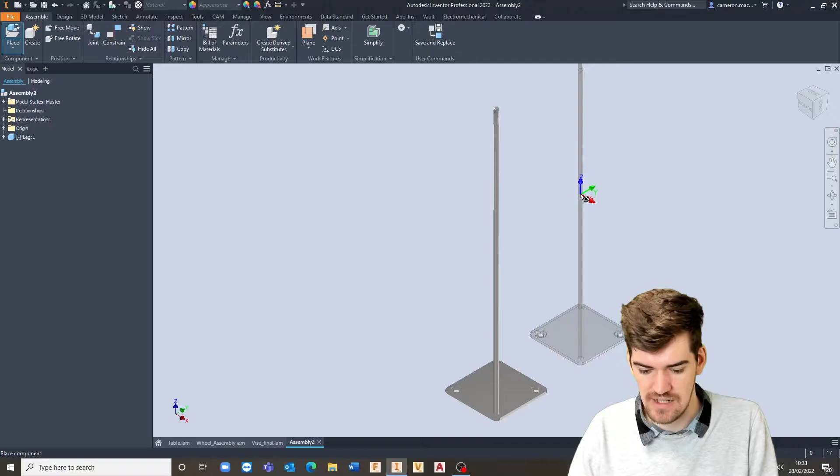It's then a case of just clicking and placing any of these down. Say, for example, I wanted to bring this leg in, I'll just open here and place it down. I can click to place that down, and I can place down multiple instances of this anywhere inside of my assembly.

Once we've got them placed in, it's then a case of adding either constraints or joints to ensure that they remain within relationships to each other. Obviously when we're placing down in the real world, we're placing legs on, or a countertop on legs, and we know there's going to be a certain relationship between those two. Inside of the assembly environment it's much the same process really - we need to establish what the relationship between certain components and certain parts will be.

As we start off, we need to essentially set down at least one item that's grounded, otherwise all of your items will be able to move freely in the open space. As you can see here, I'm just clicking and dragging to move these individual components around. What we need to do to ensure that at least one of these components stays exactly where it is, we can actually ground a component.

The other items, the other assemblies that I'll show you just now, have these in, but essentially all we need to do for that is we can pick the item that we want, the component, the part that we want, and we can ground it to make sure that it doesn't move around.

And we can do that inside of the model browser. Very similar again to the part files that we had last time. We've got this model browser here, and we've got one as well for the assembly environment, where this one lists individual parts.

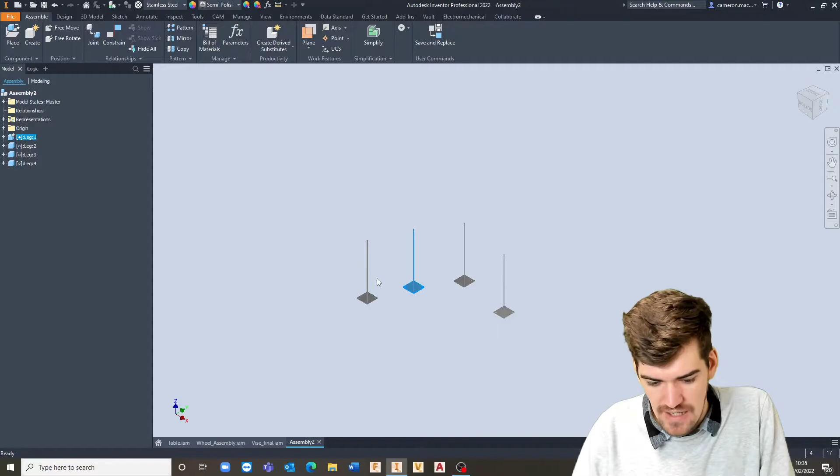So I can right click on any one of these and select grounded from the list, and you can see that adds a little pin to the item in the browser, and that leg now won't be able to move around. I'm clicking and dragging on it and it won't move, however all of the other ones move around. So we can easily place one component down, make sure it's grounded, and then start building on top of that, whether we want to add constraints or joints.

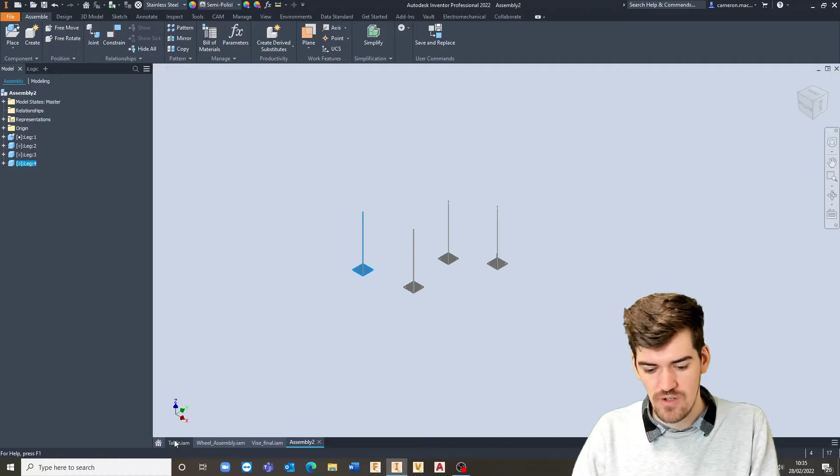I'm just going to jump over to one of the other ones that I've got pre-configured, just for the sake of time, for this demonstration. And that's this table over here.

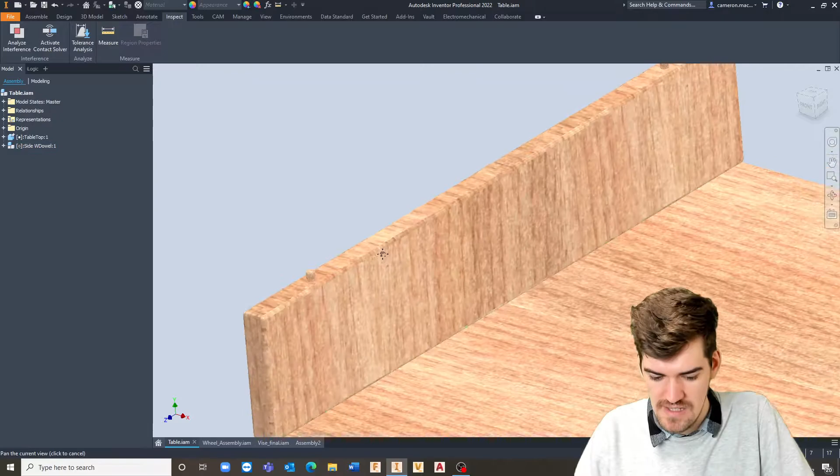As you can see with this one, I've got this tabletop, which is just a flat sheet of wood, and then I've got a side sub-assembly. The only reason it's a sub-assembly is because I've added these dowels in where the holes will attach. So you can see again, we've got a sub-assembly inside of this assembly, so that if I had to open this up separately, you'd see it's just a normal assembly with a single part and 4 dowels coming into the side, just to make sure we've got this detailed as much as we can.

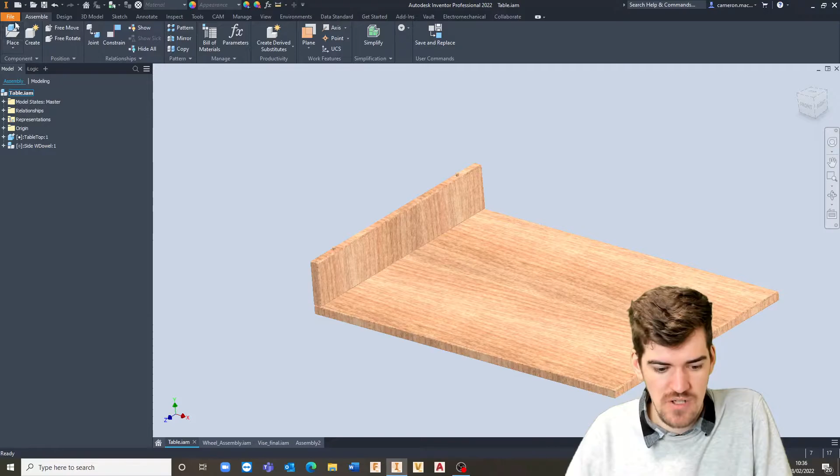If I have a look here at the assemble tab, again we've got those same options. We've got the place, and we've also got the ability to create, more on that a little later on. But essentially, we've got our 2 parts, or our part and our sub-assembly, in the list.

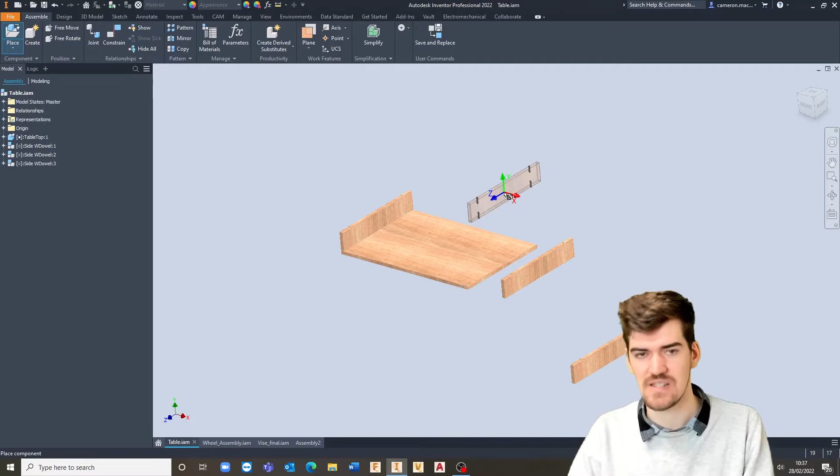All I now need to do, if I wanted to, is come in and place down from my local folder structure. So if I select place in the list, just want to make sure I'm in the right one, looks like I am, so that's perfect. And I want to place down another side with dowel, so I'm going to select this one and select open. I double clicked by mistake and it placed it down automatically, but all I need to do is place down with a single click and it'll place that item down in there. To remove this from selection, I can just hit escape, and it's done.

I can then come in and start adding some constraints to this. Constraints will ensure that there is a relationship between planes or axes essentially. Inside of our assemble tab, where all of our assembly options will be, we've got a relationships panel where we've got the ability to constrain our items together, and what that'll essentially do is lock the movement in particular directions.

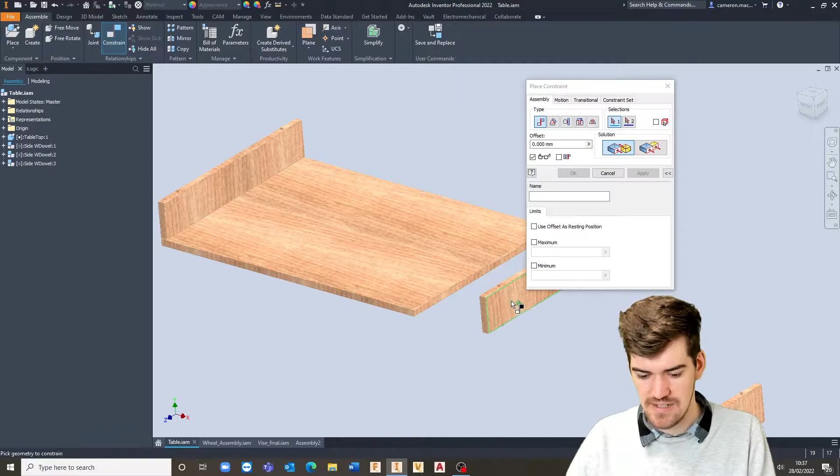So if I select constrain over here, you can see we've got the ability to add some relationships between components. So if I wanted to add a relationship now between this tabletop over here and this side with dowel, I can come in and choose different planes on the 2 geometries to make sure those 2 planes or faces have a relationship, and we can control and manage the relationship between those.

The first one, and the one we're most commonly going to use today, is the mate constraint, which can either be flush or mate. Essentially what that means is the 2 planes will either be facing each other, that's a mate constraint, or they'll be facing the exact same direction, whether attached or side by side, that's a flush constraint. So both planes are facing the same direction.

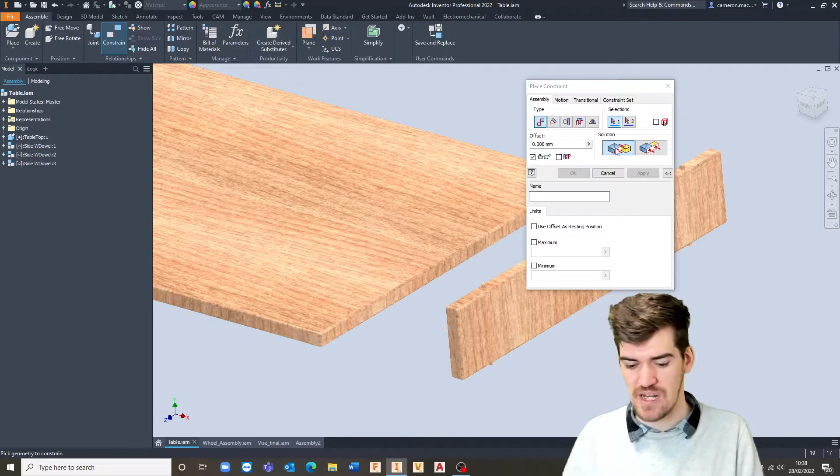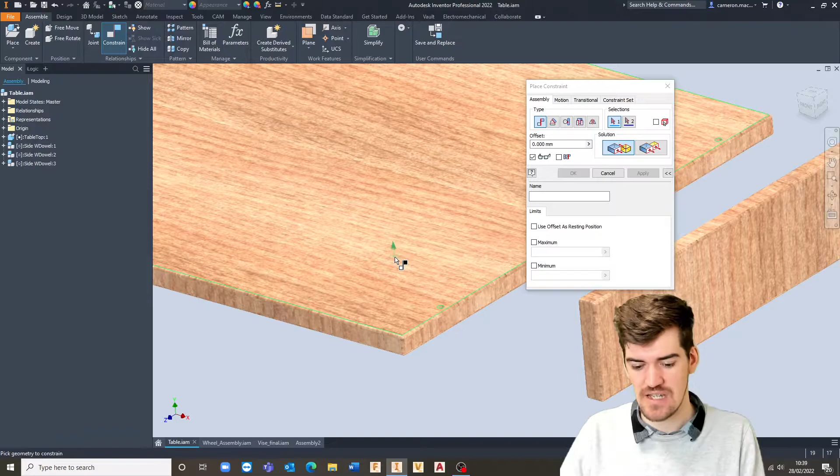And the way we know which direction they're facing is when we initially select the item. So as you can see, I'm hovering over the top face of my tabletop, and I'm given a little arrow pointing out from that face, showing me which direction this face is pointing. So if I do a single click on that, it'll add this as my first face for the constraint.

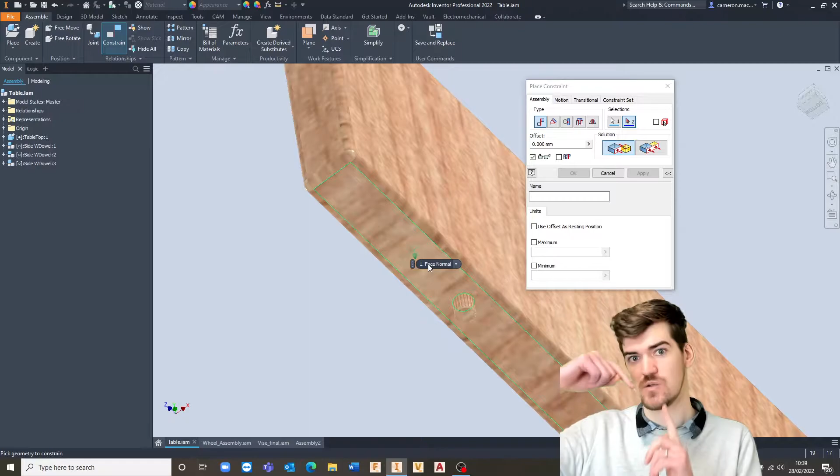And then if I move my camera around, just because I want to attach that face to the bottom face of my side panel. So you can see again, I've got the arrow pointing out from that. So I know that those two arrows need to point towards each other when the relationship is made. So if I do a single click on there, you get a little sound effect to say the relationship has been created, and you can see the alignment is correct at the moment. Those two faces are now attached to each other, and that's using a mate constraint.

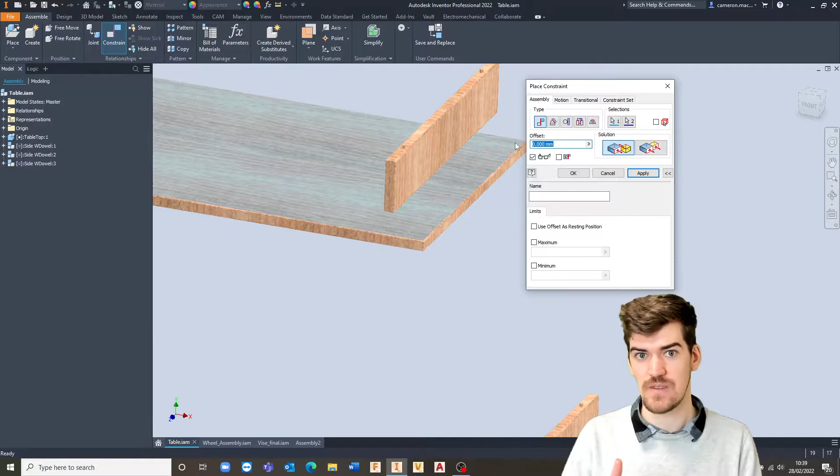I could come in here at any point and add an offset to that. Essentially that means those two planes are aligned. At the moment there's no offset, so they're making contact, but you could set an offset if you wanted to. Say, for example, if you wanted a 20mm offset, you can see if I view this from the side, there's now a 20mm gap between those two faces. In this case, I don't want one, so I'm going to put it at 0.

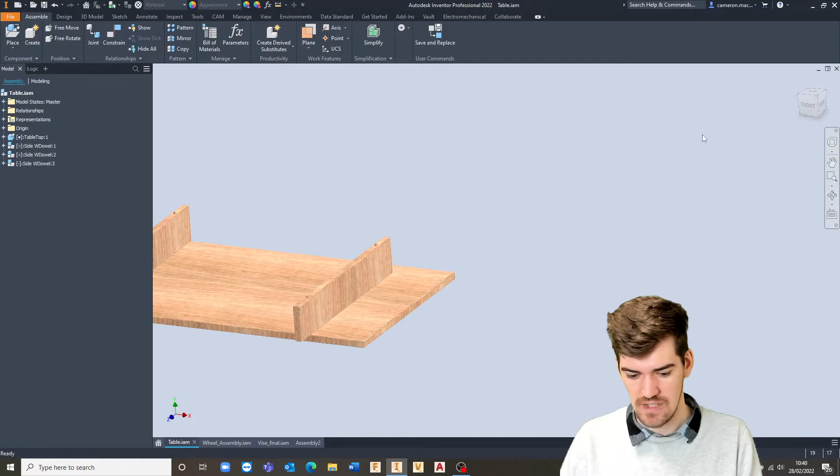Once you're happy with your constraint, you can then hit apply. And then you most likely want to add more constraints, because at the moment, if I just hit escape, you can see this side can now move back and forth along that face. It can't move up or down. If I go to the side view again, if I try and move it up, you can see it can't move up and away from that surface. It's locked on that plane, but it can move side to side, all the way off to either side.

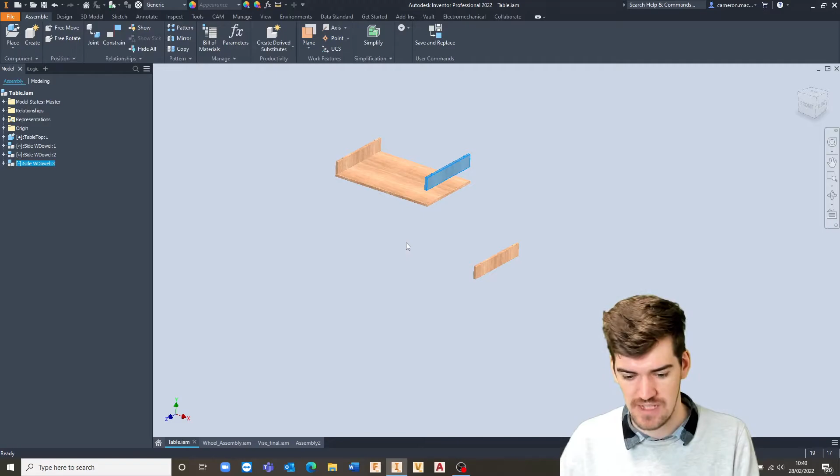That's because it's only locked on that plane, and that plane is pretty much infinite, so you can go as far away as you want, but those two will always remain in contact with each other, the planes themselves, so they'll always be aligned to each other essentially. So if you want to lock this into further positioning, obviously in this case we want to make sure it's locked to the side and locked to the front as well in its positioning. We can then add further constraints to this.

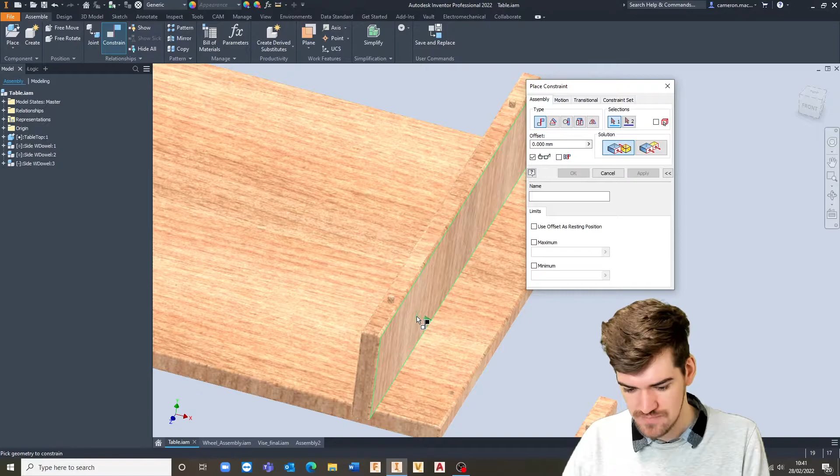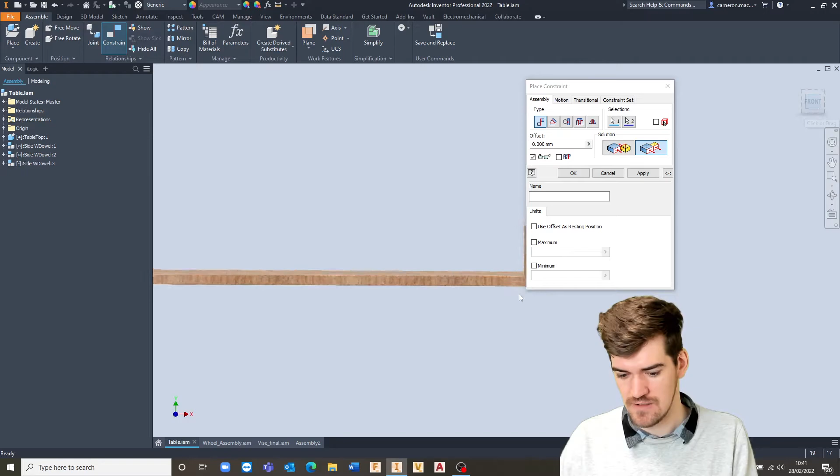So I'm going to add another constraint to the side over here. And this time, instead of it being a mate constraint, which would mean those two faces are aligned towards each other, I want this to be a flush constraint, which would mean these two are aligned in the same direction, so the plane is facing the exact same direction. You can see by doing that, if I go to the front view again, those two faces are now aligned. So if I hit apply again, that'll apply that condition to it.

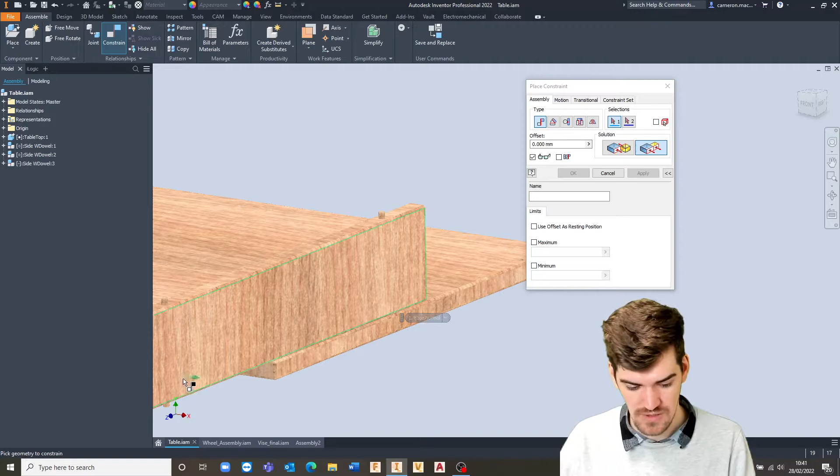And the only thing that's really left for movement now, it's locked in its position in the X, and it's locked in the Y. All that's left is the Z according to the orientation down here, the coordinate system at the bottom. So all that's left is for me to lock the direction in the Z. If I select this option, that face, you'll see now that those two are locked. If I hit apply, that then allows me to lock that.

So now with this top face locked in place, using the ground that I showed you in the previous example, you can see I've got the little pin showing that that tabletop is grounded. That means that now if I had to try and move any of these other two, they're not going to move around anymore.

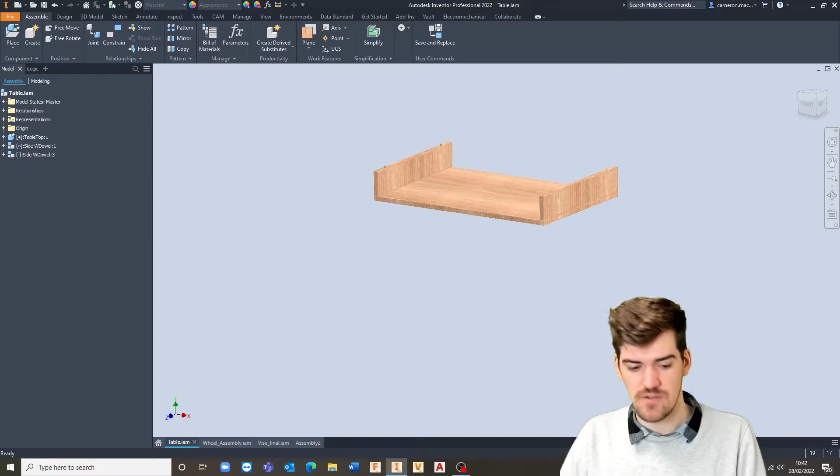Awesome, so I'm just going to delete this one quickly. You can remove ones that you've placed down before. And then the other thing I want to show you quickly is if we wanted to place legs. I'm not going to completely assemble this one, I just want to show you how we can add those constraints in. One of the other constraints we've got is the ability to, I'll show you now with the other tabletop that I'll apply to the top of this one.

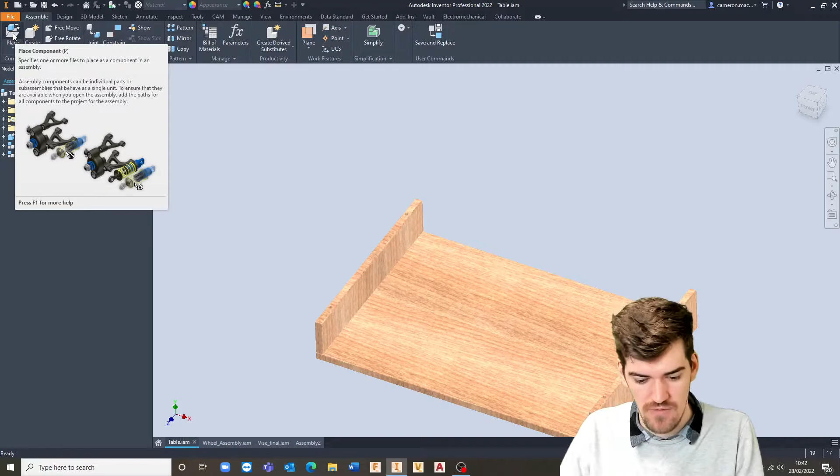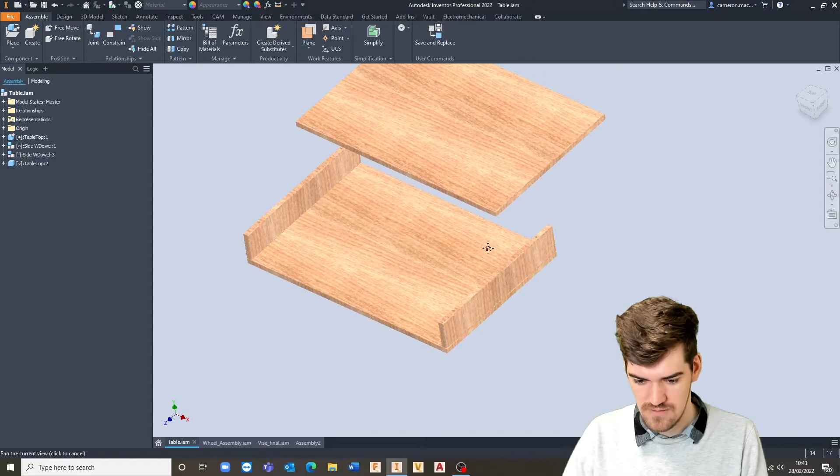So if I had to come in and place another one quickly, I'm just going to use the same assembly tabletop, and place it down just like that. You can see with this one, trying to remember if there are any holes for the dowels in here. Yeah, they are, perfect. So you can see I've made little holes there for the dowels just to show how we can use other constraints to apply that.

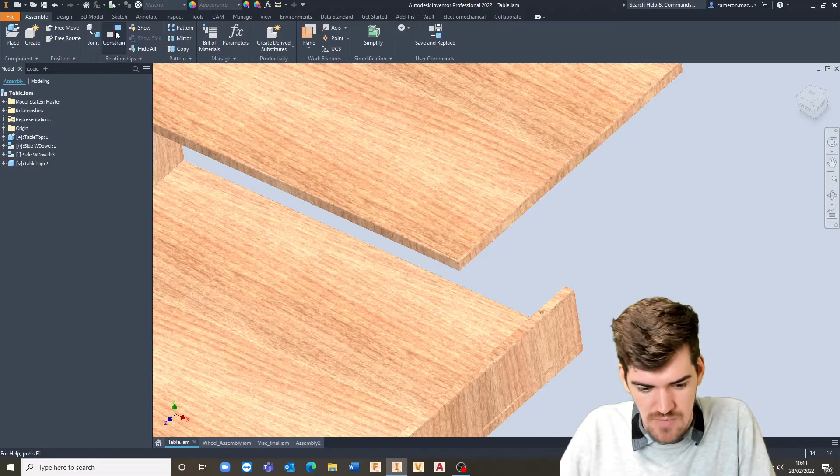So if you didn't just have a flat surface, you've got a cylinder that you want to insert into a tube or something, you can use constraints for that as well. If I come into the constraints option over here, you'll see we've also got the ability to use a mate constraint, and an angle constraint, which will drive the angle between planes. Much like the mate constraint is at 0 degrees, flat up against each other, the angle constraint adjusts the angle between those. We've got a tangent constraint, between a circular surface, so a cylinder, and a flat surface, to make sure those two are always tangential to each other. And then we've got an insert constraint as well.

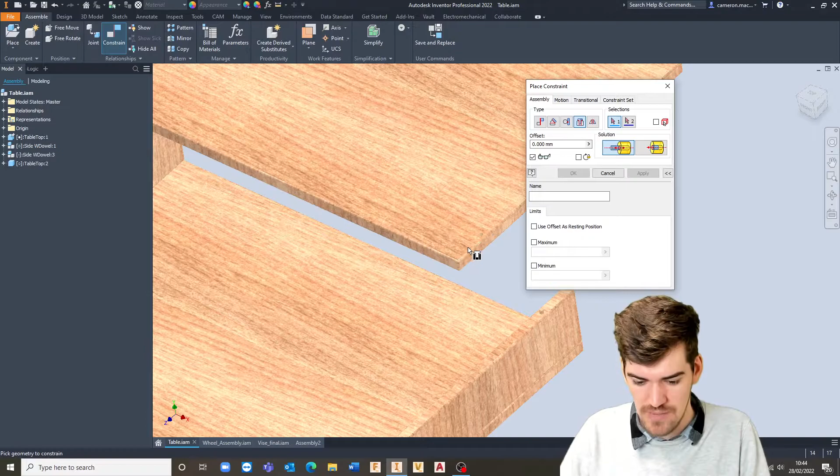I'll just show you the insert constraint for this one as well quickly. You can see I can use a circular reference there for the cylinder, the extrusion that I've created in this hole, and it picks up a central axis. What that'll do is align that one to the dowel that I have on the other side.

So I'm just going to pick this one over here, and bear in mind the direction of the arrow. It's always important to bear in mind the direction of the arrow. It's pointing up out of the hole. I then want to select this one, and you can see this one's also pointing up out of the dowel. If I select that one now, notice how it's automatically picked that up for me. So I haven't really had to do anything.

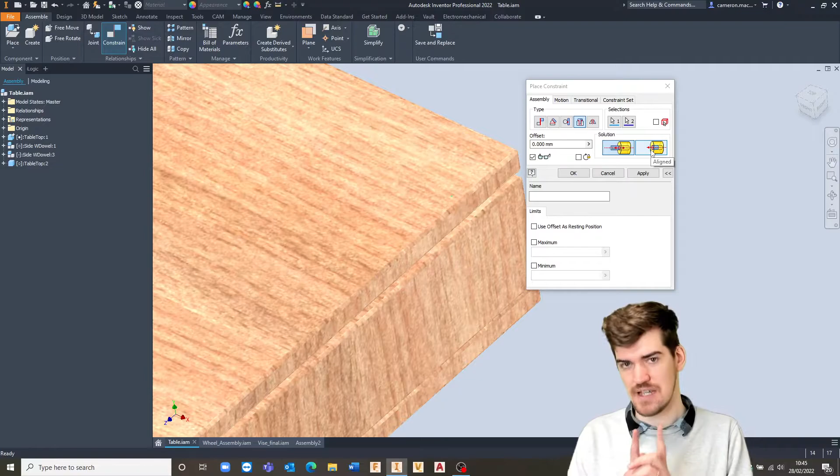You can see we've got opposed, which means the two arrows will go opposed to each other, or we've got aligned in the solution, so the two arrows will point in the same direction. In this case, Inventor's picked that one up automatically for me, so I don't have to worry about that. But if at any point I did want to switch that around, I've got the ability to switch that around, and you can see those two arrows are now aligned. In this case, it was correct the first time around.

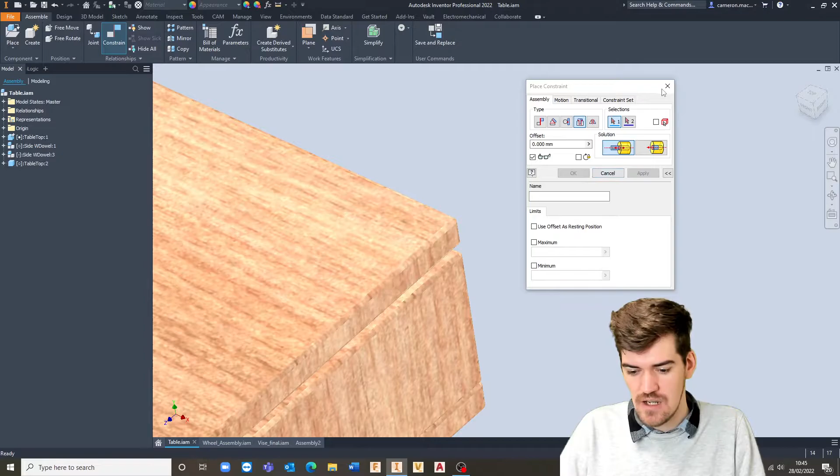So if I hit apply on there, with this being an insert, it's a cylindrical relationship, so this will then be able to rotate around in that. And now if I wanted to lock that one's rotation, I could then just come in and apply that to another dowel on the other side. I'm just going to use this one on the opposite side, but it could be any one of those as long as you've got it configured correctly.

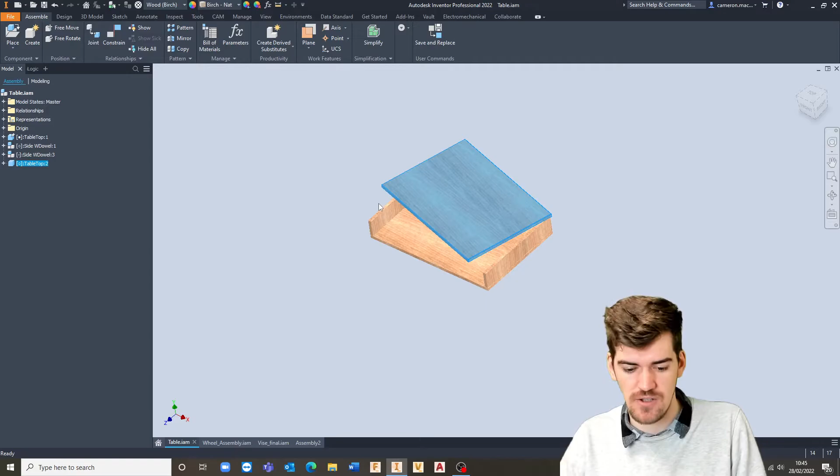And you don't have to apply a relationship between all of the parts, so you don't have to come in and apply a relationship to each of the dowels. As long as your part is locked into the correct positioning, and you can't then toggle it to move it around, you should be good to go from there. It's more just to make sure that you've got everything aligned and assembled correctly.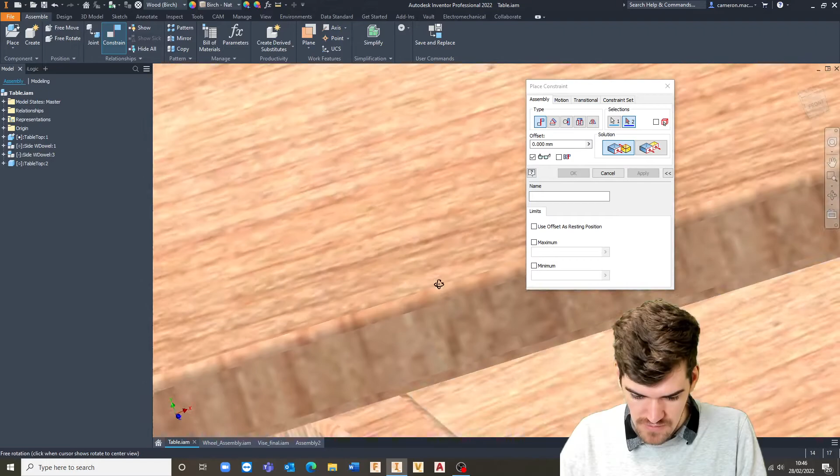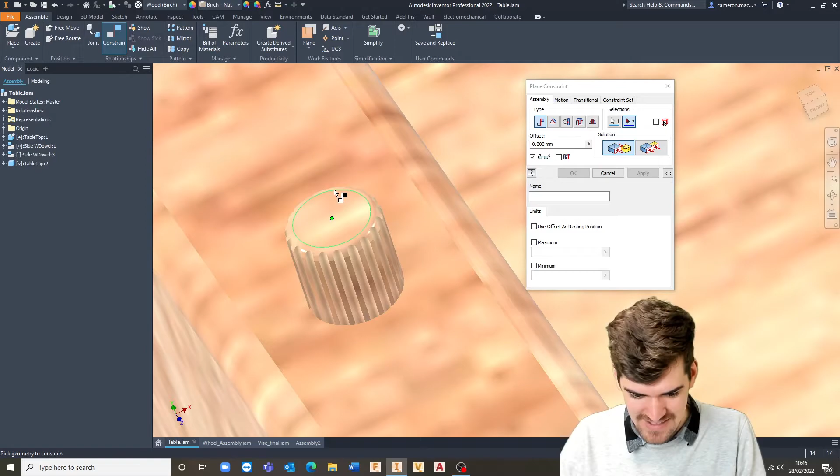So if I just had to come in, struggling with this guy a little bit, you can see this one's now in the opposite direction, so I'm just going to leave that as is. I think I'm using the wrong geometry, apologies for that. Struggling to pick that up because of the geometry I've modeled in. Let's... there we go, that's better. You can see that's now automatically picked those up for me, so that's perfect.

I'm just going to hit apply, and you can see this one's created a mate constraint between those. So you could use a mate, or you could use an insert. If I hit apply on there, if I now move this, it's not going to move around anymore.

One way we can analyze this quickly is under View, we've got Degrees of Freedom, and that'll show any degrees of freedom that an individual component will have. We can manage these relationships inside the Relationships panel in the model browser over here.

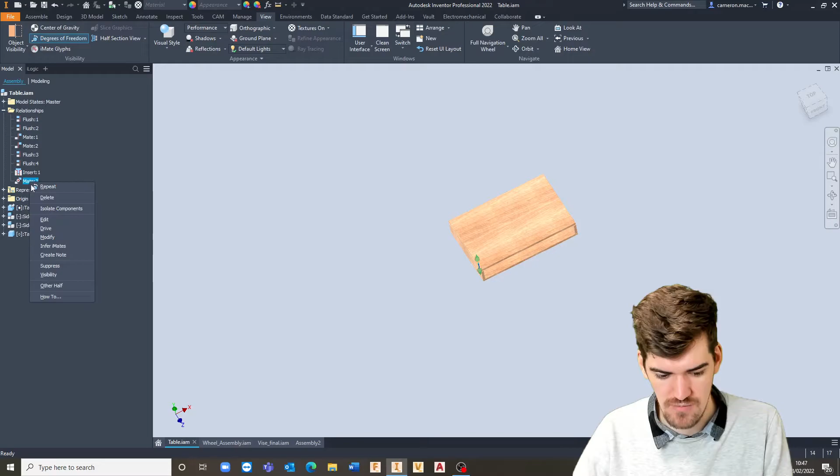If I expand Relationships, you can see all the individual relationships inside there, all the constraints. If I remove this one by right clicking and deleting it, you can see the degree of freedom, the amount of movement allowed, is only at that particular pivot point, and it's got a rotational degree of freedom, so it can rotate anywhere around that axis.

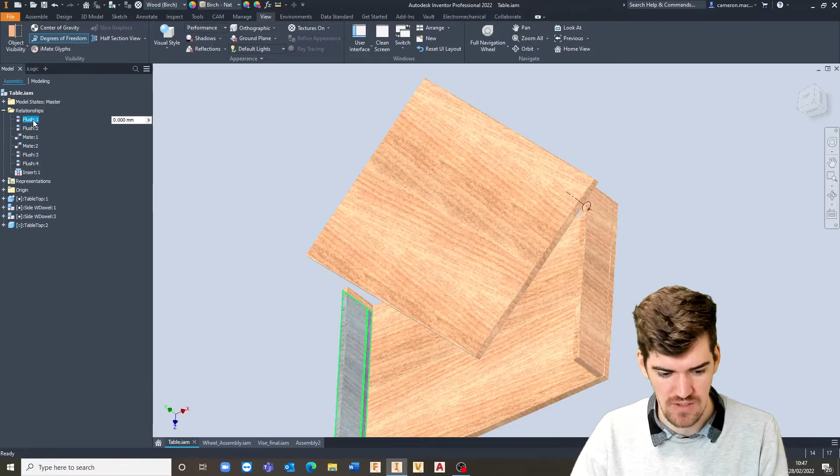You'll be able to see if we remove any of the other ones. Just for this demonstration, I'm going to remove everything. You can see every single component now has the ability to move in any direction as well as rotate around any axes. So we've got the ability to analyze that using the degrees of freedom inside the View tab.

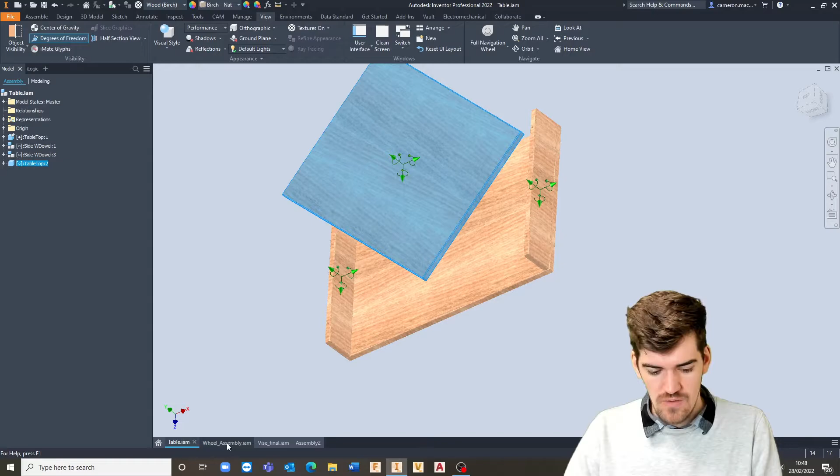The other way we can add relationships between parts: as you've seen, we've got the ability to lock between planes and axes using constraints. They've also added the ability to create joints, and this is a bit more intuitive. It will basically pick up based on any geometry inside your parts, and create a relationship between two parts using any bit of geometry that exists inside your components.

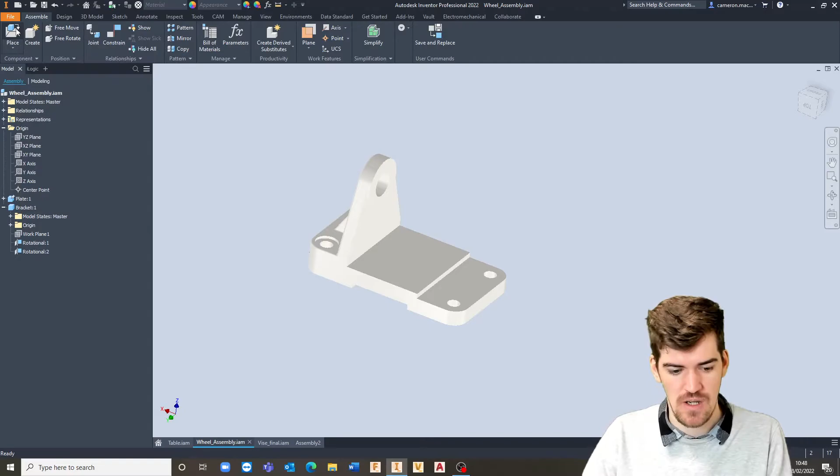So I've got here just this plate and a single bracket. I'm going to drop in the rest of this assembly quickly. I'm going to place it down, and I believe it should just be in wheel assembly. I'm going to place down a wheel, because obviously a wheel assembly needs a wheel. Place that down, hit escape, and go place down a plate. We've got the plate.

We only need a bracket, an axle, and that should be it. I can come in and grab multiple at the same time and just select open, and it'll place those down for me. I can then hit escape, and it'll remove that from the selection there.

So you can see in the Relationships panel, next to Constraint, we've got the ability to create a joint. A joint will look at the geometry of the components you want to create the joint between, and essentially create multiple points along the surface or along the geometry of that.

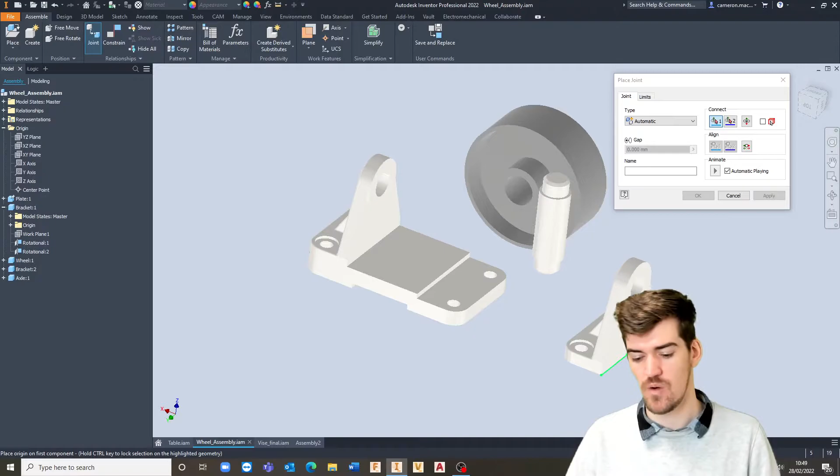If we look at this face of the bracket, anywhere along the face, either at an edge or in the middle of the edge, so on a corner or the middle of the edge itself, we've got a point that we can choose from. And some surfaces will also have a point right in the center of the surface.

All cylinders will have 3 points that we can choose from: either the outside on one side, the outside on the opposite side, or right in the center of the cylinder. If I hold down Shift, I can switch between them; with Control, I can switch between them as long as that particular one is selected.

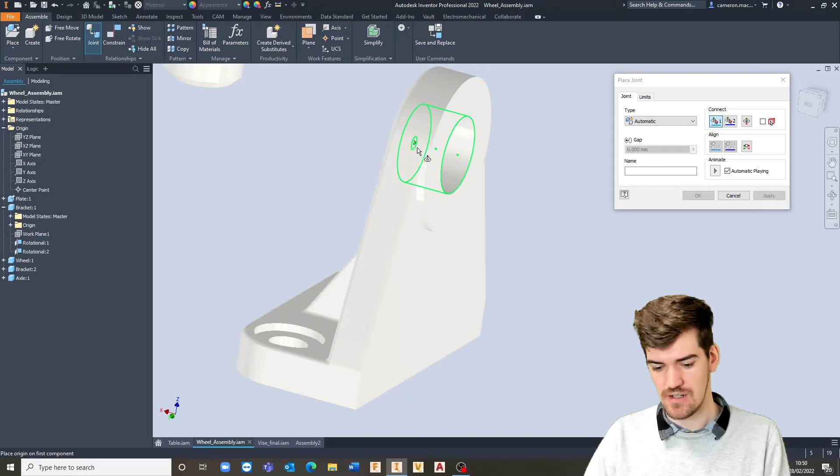As long as this one is highlighting in my browser or in my view, I can hold down Control and switch between the different points, which helps ensure nothing else is chosen during that selection process. I'm holding down Control and moving my cursor all the way off that face, and it's still giving me the ability to pick those points.

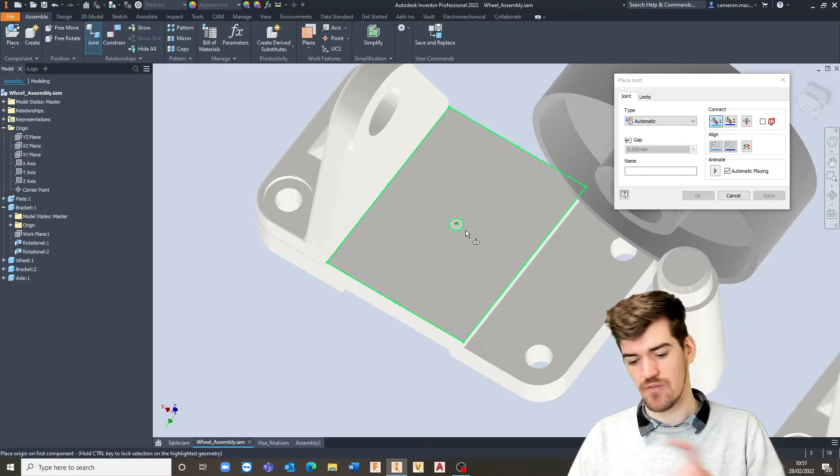If I look at the top face over here, you can see there's a point right in the center. So any of the square faces or simple faces will have a point right in the center. Otherwise, it'll have different points along the sides that we can choose from.

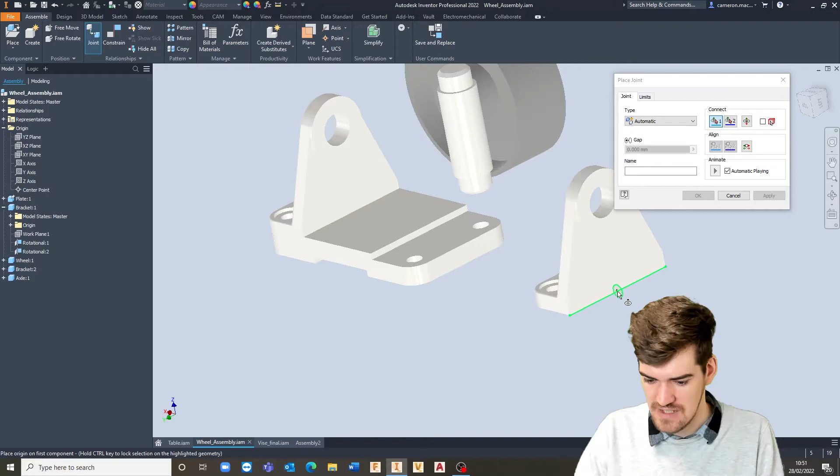You just want to make sure that the two reference points are correct—choosing a reference point on one body and a reference point on another body, and how those two relate to each other. So it's a case of coming in, selecting that point right down the bottom middle corner of that bracket, and then choosing its opposite point to make sure the alignment is correct, just that point over there.

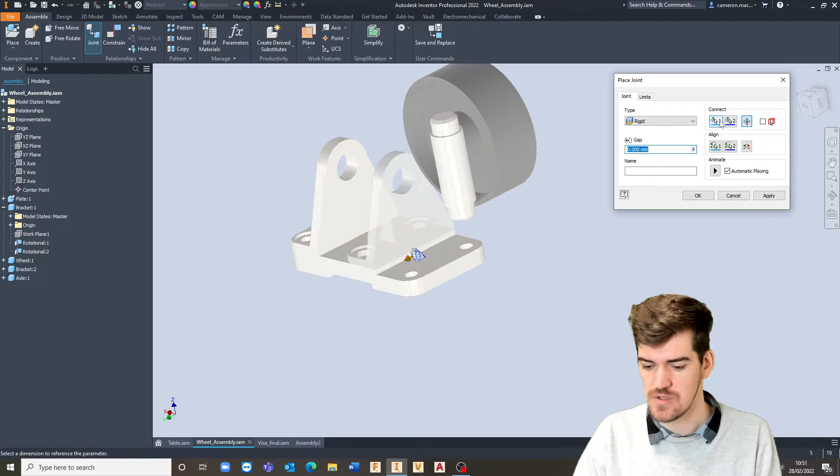You can see that once it's come in, it's created that relationship, but now maybe those two are the wrong way around. We've got the ability to flip those around, so we've got the ability to flip the alignment, and we've got the ability to flip the connection as well.

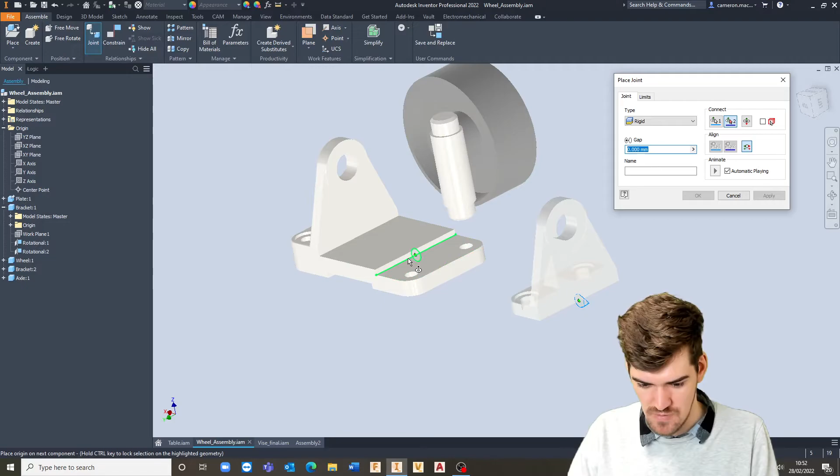Sorry, I'm choosing the wrong button here, let's try that again. We've got the first point, which is there, and our second point, which is there. That's perfect, and we've got our alignment which we want to choose there. Let's just give that another selection—I've chosen the wrong button there, apologies, let's just try it again. So first selection, second selection, and we've got that there.

If we want to flip the direction, we've got a little flip button to the side, which lets us flip its orientation or its alignment as well. So if we did that and that, you can see the complete opposite is what we were needing for that one, and it's adjusted that alignment. Having that one turned off or flipped in the other way changes the direction, and the other one changes the alignment.

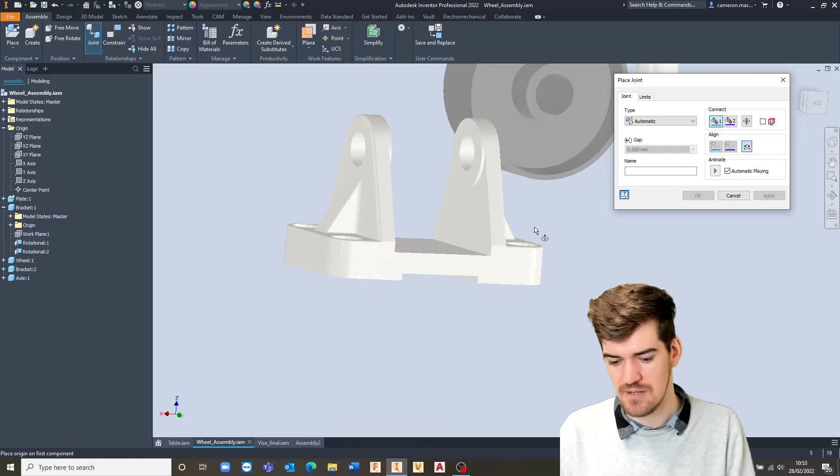So just with a single selection now, instead of the multiple that would be required for a constraint, we've now got the ability to come in and apply that joint between those two. You can see if I drag this now, it doesn't move around anymore. We can also come in and, again using these joints, we've got further options.

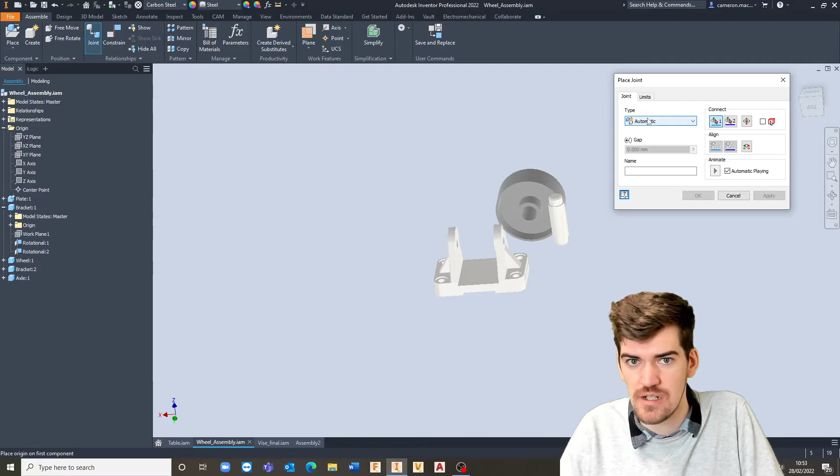By default it'll pick up an automatic joint, so Inventor knows what joint to use. Otherwise, we can drive exactly which joint we want. If it's under automatic, Inventor will create a joint based on the geometry itself. If we want to override it, we can come into the drop down and say we actually want a rigid joint, or a rotational, slider, cylinder, planar, or ball.

Rigid will ensure that those two planes, similar to the mate constraint, have no movement whatsoever where they're attached—no rotation and no movement. Rotational will allow some rotation on that particular one. Slider, very similar to the mate constraint, just allows constraint in one direction, but it will then be able to slide around. Cylinder will allow rotational movement, and they're quite well named, so it's intuitive in the naming convention—you could play around with those as well.

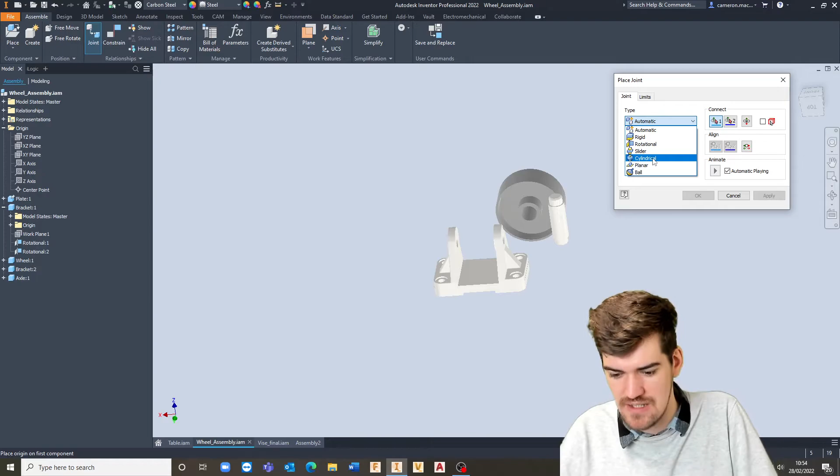For this case, I want to create a relationship, or a joint, between the axle and the brackets themselves, so I'd want a cylindrical joint there. I want to pick between this face over here, maybe about the middle of that face or that cylinder, and then the middle of this one here. You can see by creating that, it's allowing movement back and forth as well as rotation from there.

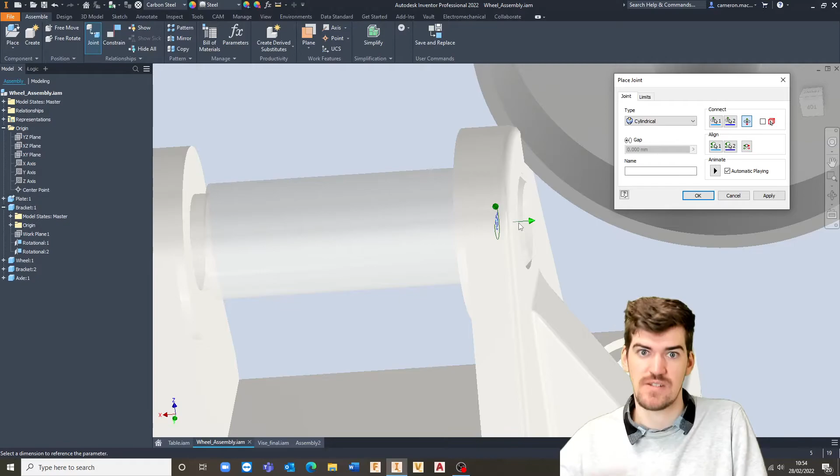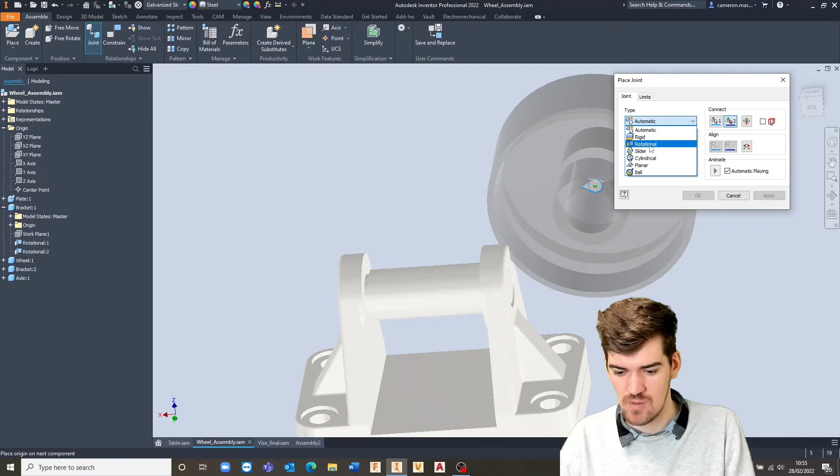If I hit apply there, you can see we've got rotation available to us. I suppose you can't really see the rotation much on this one, but it has the ability to rotate. What we can then do on top of that is add another joint, this time between the wheel and the axle we've just placed in, and instead of it being automatic, I want it to be rigid because I don't want any movement between the two—I want all of the rotation to happen at the axle itself. So I'm just going to hit apply there.

And then we've got this wheel that's now able to rotate around in there. It's able to move back and forth, and that's just because of the rotational element to the rotation constraint or the rotation joint.

If we wanted to, we could then lock the positioning. We could set an offset from the center of that axle to the side of the bracket itself, and just make sure that that stays in place. But now we've got a fully moving object available to us, which is great with the joints.

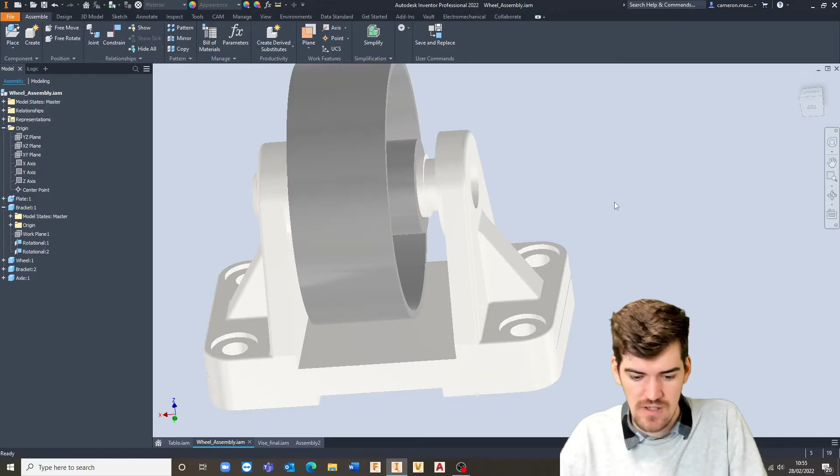So we've got the ability to ensure that those are able to move around, and that's essentially the ease of using joints. It combines multiple constraints into one single joint between two bodies. So you only should need to use one joint between bodies. Sometimes you can add more, but generally speaking, you'd want to only use one joint between bodies.

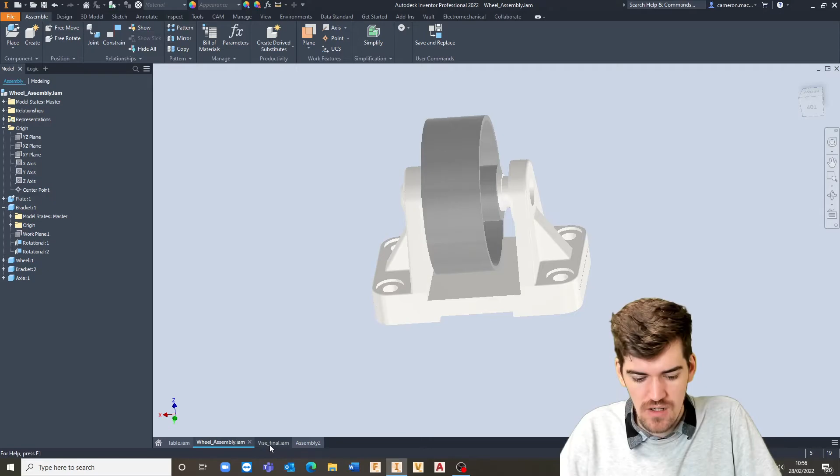One of the other things I want to show you quickly is just under this Vise final assembly file over here. We've got the ability inside using our assemblies to kind of analyze and detect certain things inside of, or during the movement or during the creation of our assemblies as well.

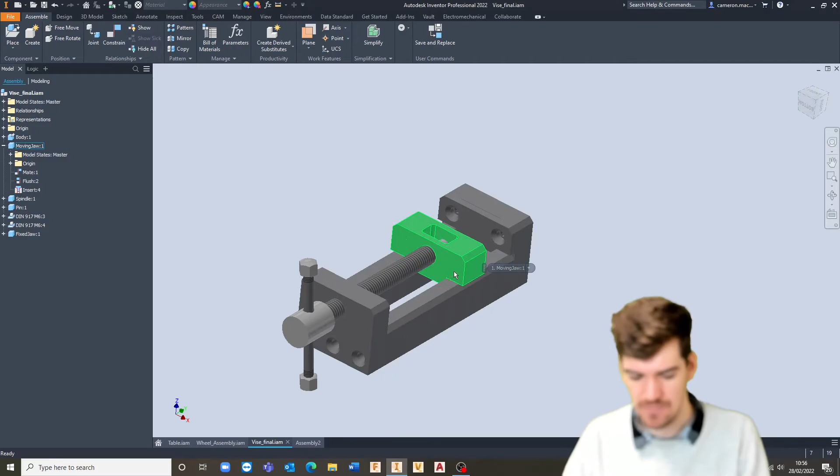So just having a quick look at this vise that's been assembled for us here. It's fully constrained in the fact that it has all of its relationships built up, it's got all of its constraints. So you can see by rotating this around, it allows the spindle itself to move around, and it's also allowing us to move the spindle back and forth, and this entire moving jaw can then go all the way in.

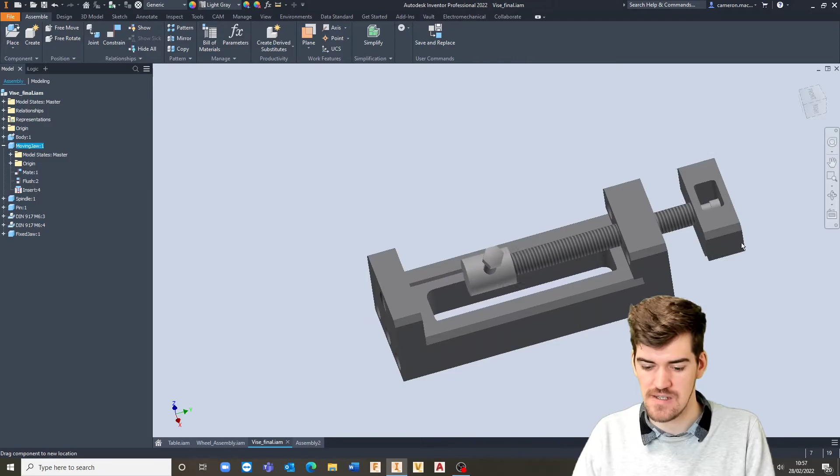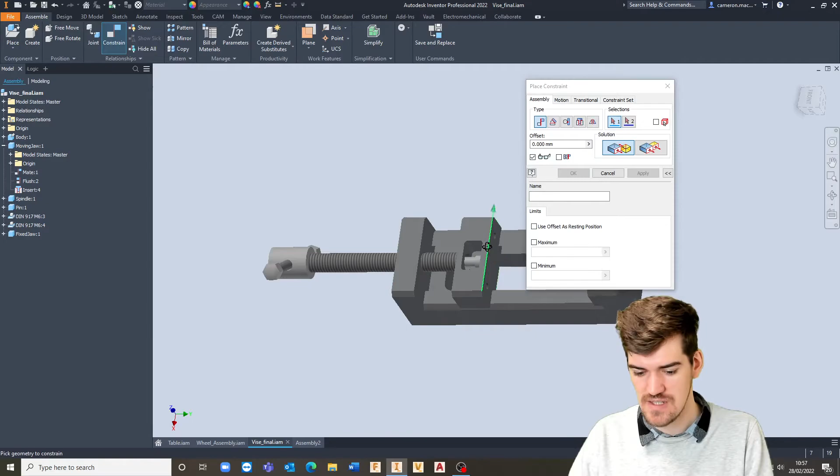But obviously now what we're detecting is that there are some collisions that are possible as part of the setup. What we could do if we wanted to is we could create a constraint and drive it inside of Inventor. So we could come in and set this constraint over here between these two faces and ensure that they have some limitations to them.

We can come in and say between this face over here of the fixed jaw and this face of the moving jaw, we want to set an offset of maybe 40 mil, and we can then apply that.

Or if we expand our further options, we've got the ability to set limitations to that. So if we wanted to, we could come in and set a maximum, and we could also set a minimum of maybe, let's say 10 mil. And if we hit apply on there now, what that essentially will allow us to do is move that back and forth, but it'll only go up to a 10 mil offset, and it'll only go back to a 40 mil offset. So if you wanted some form of conditioning to the relationship itself, we've got the ability to add those limits in as well if we wanted to at any point.

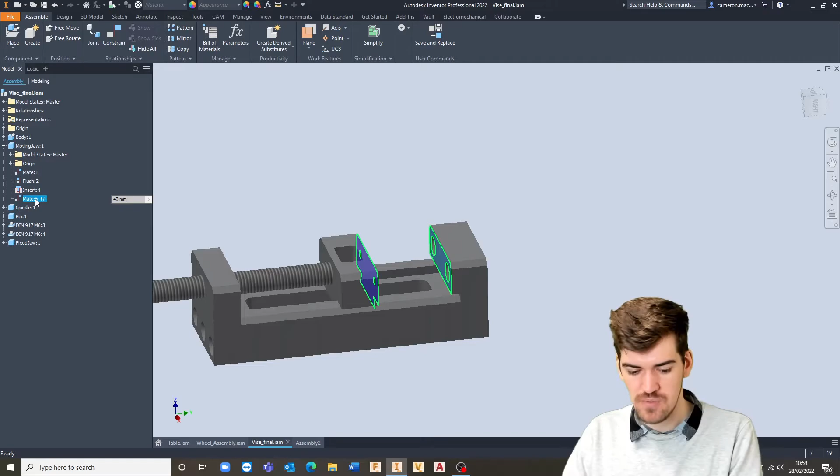But say for example you're designing and you don't want to add in these limitations, I'm just going to come in and delete that new mate that I've just applied there. Just hit delete on there. But say for example you wanted to ensure that those two objects can't actually collide with each other. As you've seen, these two can just come in and collide.

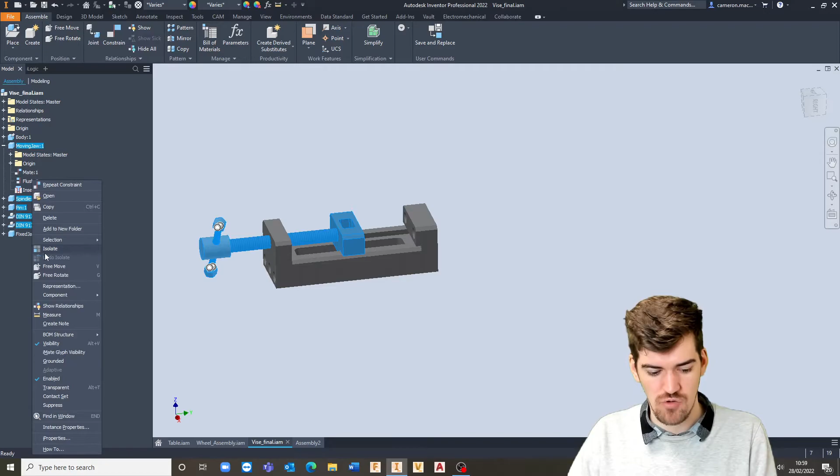What we can do as well inside of Inventor is we can add what they call contact sets. So by adding contact sets, I'm just going to select these guys over here quickly. We can then make groups of objects that then won't be able to go through each other.

They'll be considered solid geometry, and wherever they come into contact with each other, they obviously then stop right where they are. I was going to select all of them, but in actual fact we don't have to select all of them. We can just come in and say between the spindle, this moving jaw, maybe this base one, and the fixed jaw itself, we want to just make them contact sets.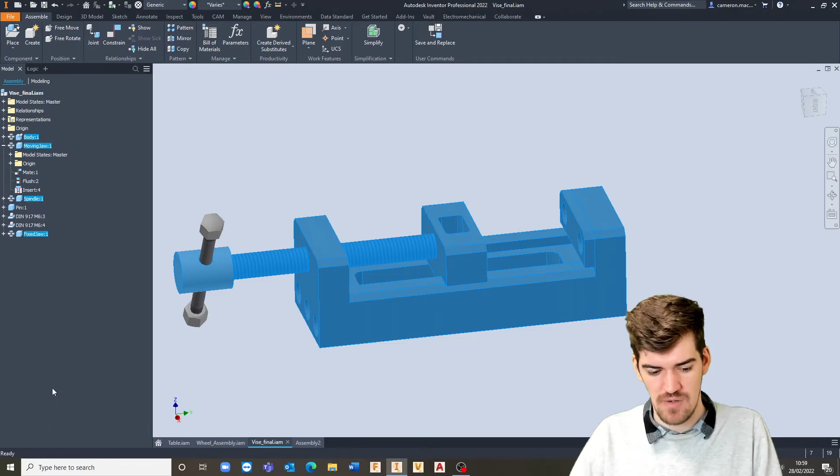So if we right click on any one of those with those selected, we can turn on contact set, and what you'll notice is we've got this little icon that appears next to the item inside of the browser, and that just gives a visual feedback that these are now part of a contact set.

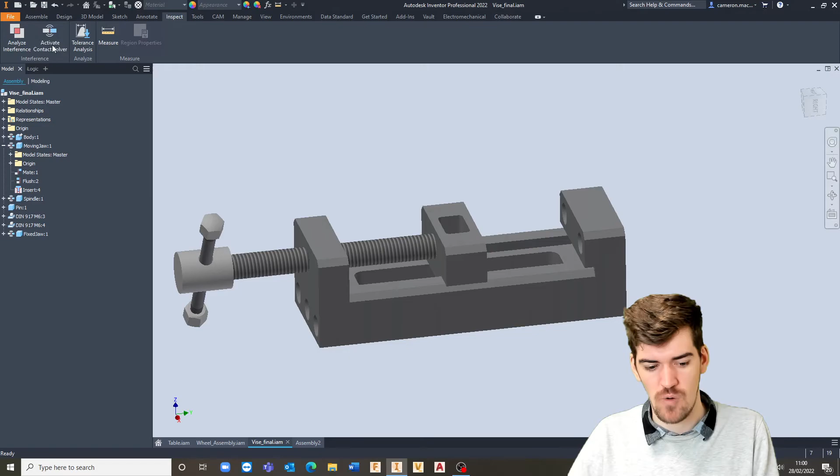If I go over to my inspect tab, I've got the ability under the interference panel to turn on contact solver, or I could turn that off and contact solver will then not be active. So by default, even with those contact sets turned on, it doesn't necessarily mean that's on yet. We would need to activate contact solver.

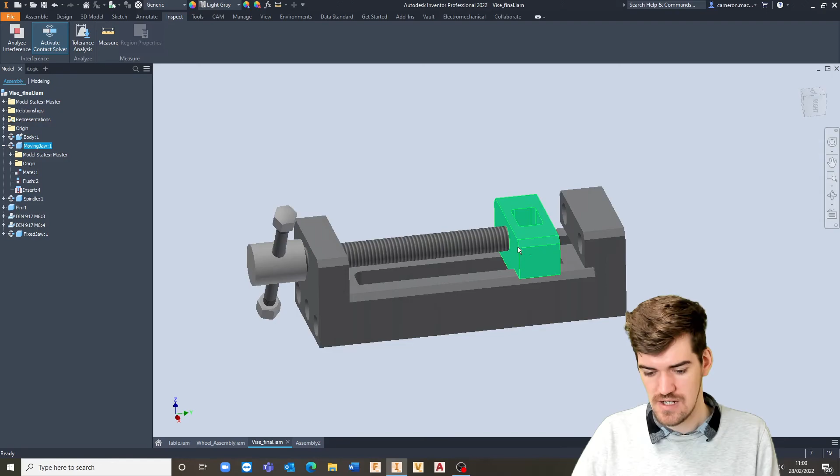As soon as we've done that, you can see now, as soon as those bits of geometry come into contact with any other, I'm bringing that to that point there. Because it's making contact over here, it's not allowing me to move that any further. The same will be the case the other way around. So wherever it comes into contact with a contact solving body, with another contact solving body, it won't be able to move beyond that point.

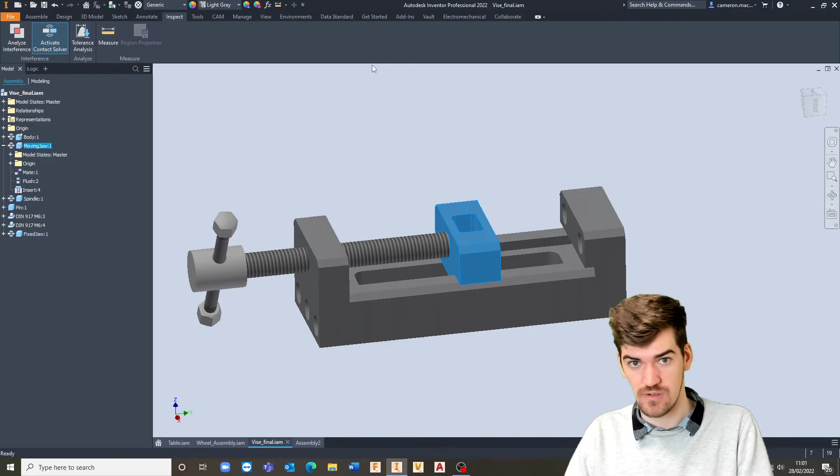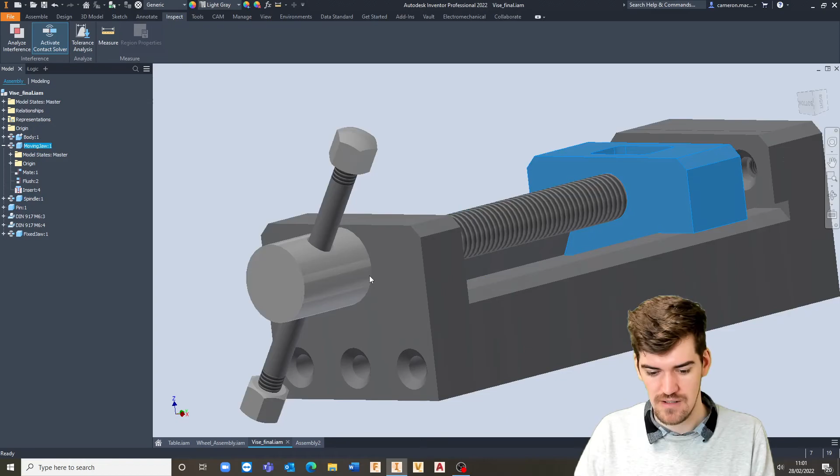So that's all good and well, but maybe sometimes you want to see how much of the part will go through a particular item or another part, how much the two parts will come into contact with each other, or how deep one part would go through another part. Maybe you want to allow movement. In this case, it's only going to go up to that point, but we want those two moving jaws to go a bit further. We could extend the length of the spindle itself, but maybe we want to make sure there's a bit of a gap here where we can cut out and allow the head of the spindle to go in.

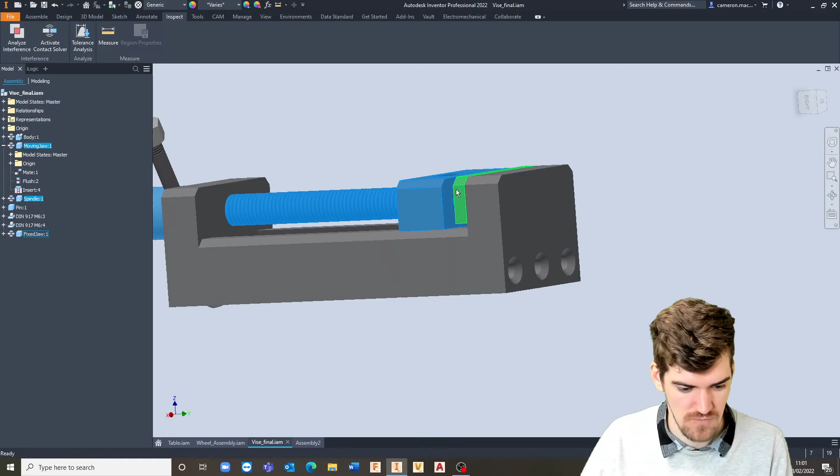What we can do, if we wanted to, is turn the contact solver off quickly and make sure that this is aligned all the way to there. In this case, we would obviously have another jaw or a pad just for protection on the moving jaw itself, so it won't be all the way up to that, but just as a form of reference, what we can do is actually solve how much volume is being intersected.

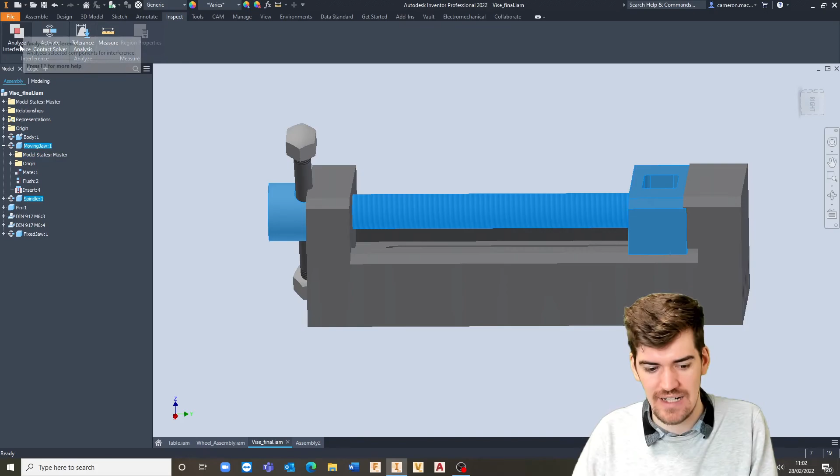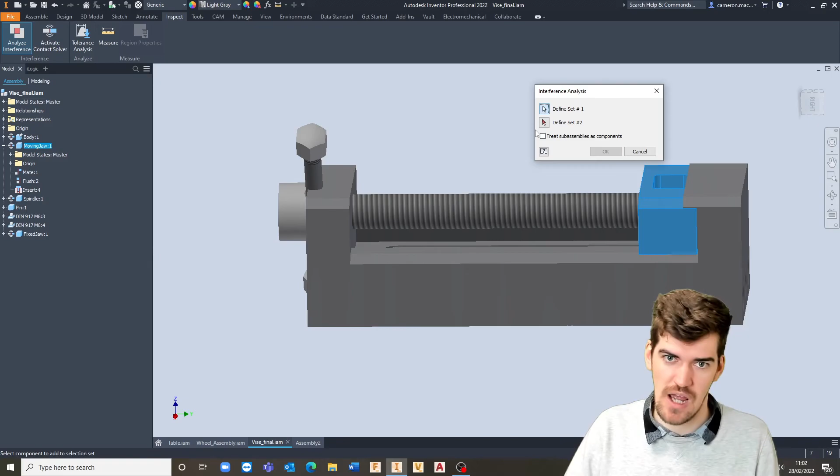So we've got the ability to come into our Analyze Interference option inside the Interference section, and if I turn this off quickly, there we go. It allows us to define two different sets of bodies or parts and compare the overlap between those. There might be some overlap you're happy with, and some you don't want. So we can choose Set 1 and Set 2, and as soon as we hit OK, it gives us a preview as to how much of that volume is considered to be intersected, or interference essentially, so how much of that is intersecting another part.

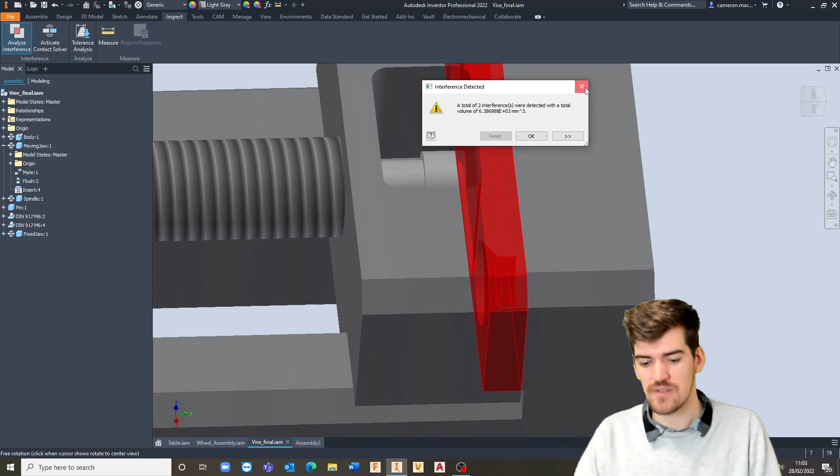You can see we've got a total of 2 interferences with a total volume. We've got some over there, and we probably would have some on the other side as well if I'd selected that spindle. But it's essentially picking up between the main body, the fixed jaw, and the moving jaw. We could then use that data to analyze how much volume we need to take out, or where these intersection points are. You'd imagine this is the same for bolts — if you have bolts going into a part and they need to be cut down, or you need shorter bolts, you've got the ability to very quickly analyze that using our Analyze Interference option.

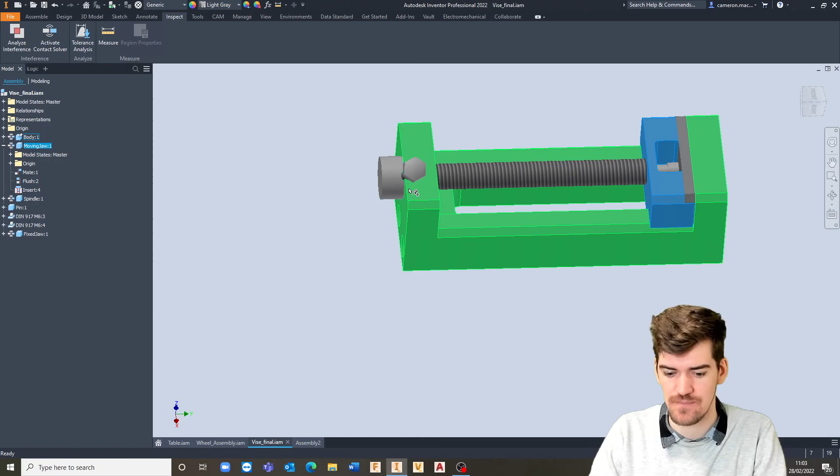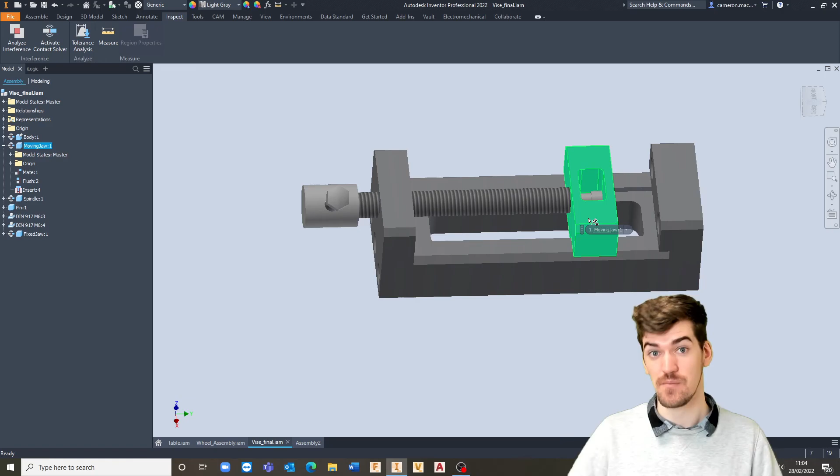So yeah, I hope that's been beneficial for you. Sorry, I've gone over a little bit, but I just wanted to drive home the fact that we've got the ability to create our assemblies using constraints and joints. And on top of that, we've got the ability to drive those joints, or drive those constraints as well if we need to. So we've got the ability to add some limitations to those, and we've also got the ability to analyze the movement of those inside the assembly environment.